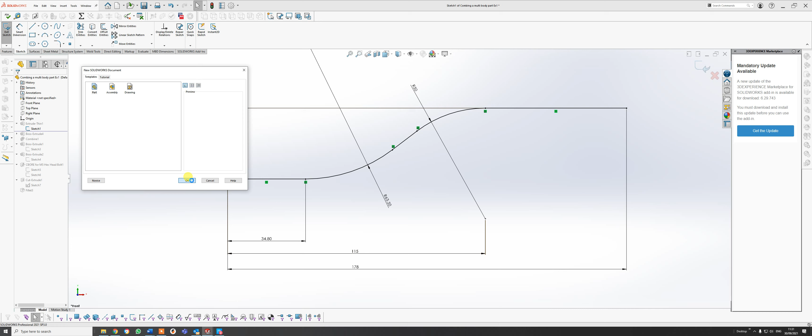Okay, that's the information from Sketch 1. So I'm going to open up a new drawing to do exercise 2. So new part. Okay, and I'm going to do this as a multi-body part, and first of all, we're going to do two separate sketches. So first one's the easy one.

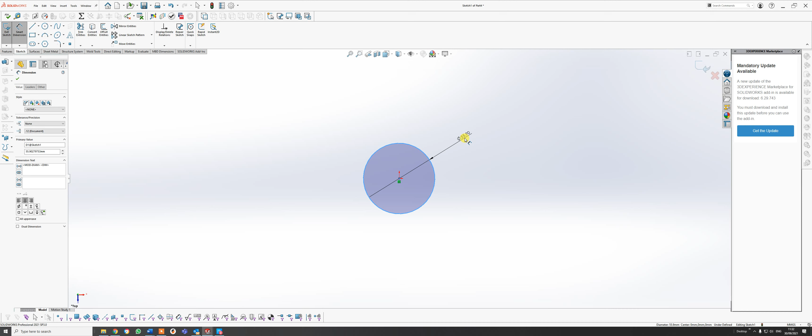So I'm going to go to Sketch. I'm going to pick the top plane because I want the plan view, and I'm going to draw a cylinder that is 50 millimeters in diameter. So just define that. Okay, and diameter 50. Okay, fully defined, and features. Now I want this to go down the way, I don't want it to go up the way. Let me just turn that round.

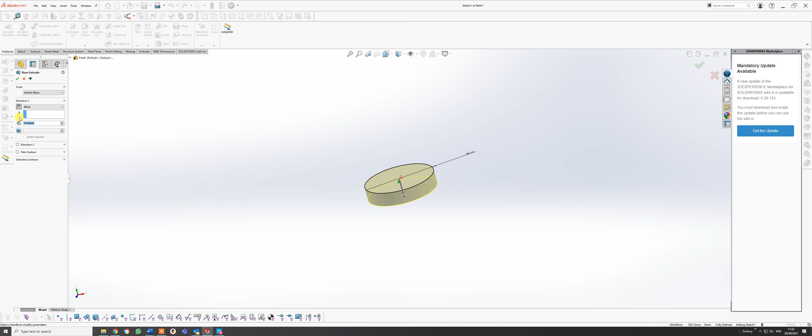Go to features, extrude boss base. Okay, I want to reverse that and go to 50. Sorry, 40 actually is the correct dimension. And I'll give that a green tick. Okay, so that's part 1. I now want to do my second sketch off there, and I'm going to do it off that top planar surface, which is the same plane anyway.

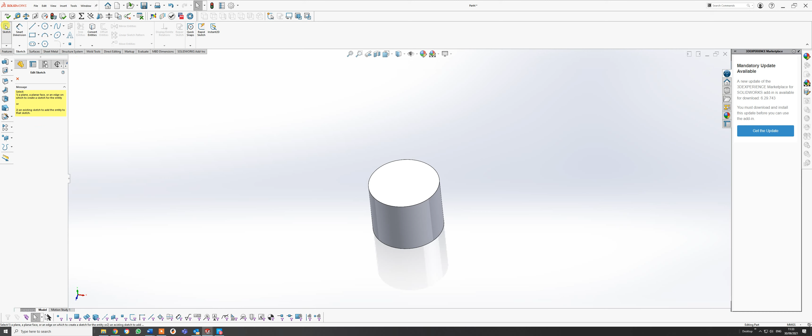So if I go to Sketch now, Sketch again, on that top surface. Now this time, press the space bar, and I'm going to go from the top because there's quite crucial dimensions here. So just zoom out a little bit. I'm going to draw a pattern here and then put the dimensions on afterwards, because it's a little bit easier to do that. So I'm just going to do this shape here.

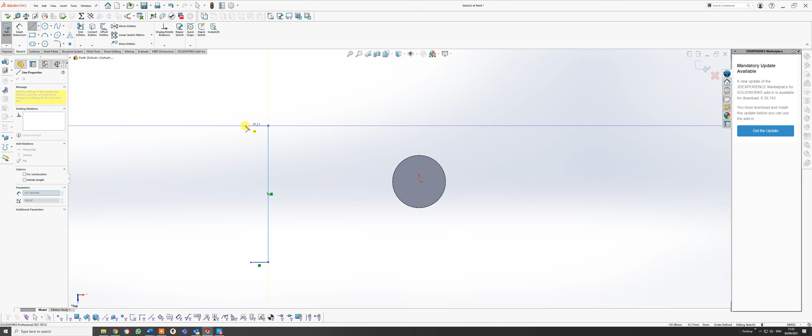Okay, into there. Now there is an arc, so press the A key down to about there, and then down to there. And I just need to tidy this up now. I'm also going to put a construction line in just to make life a little bit easier for myself. You'll see why in a second. And I've got my little indicator that's horizontal. And you see it's defined in terms of the horizontal, but I can pull that out as far or as small as I want to. I just want that as a reference.

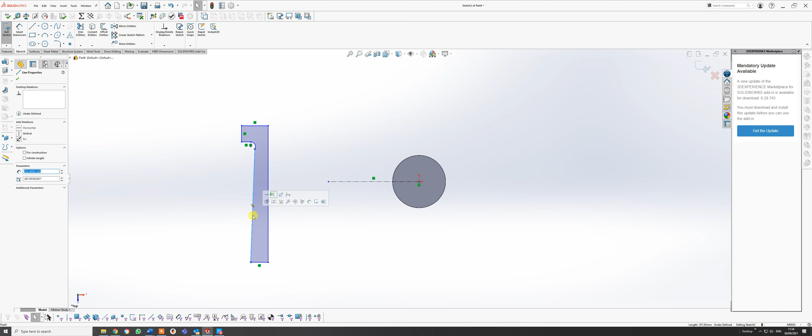So first things first, I want to make that vertical, perfect, and that one there, hold the shift key down. I want to make that tangential to that curve, and I do have some dimensions here. So the overall dimension here, let's start with this one here. So I'm just going to pick up on the line and make that 20. Okay, as I said, you do have a slightly different version than I have, so that's 20 there.

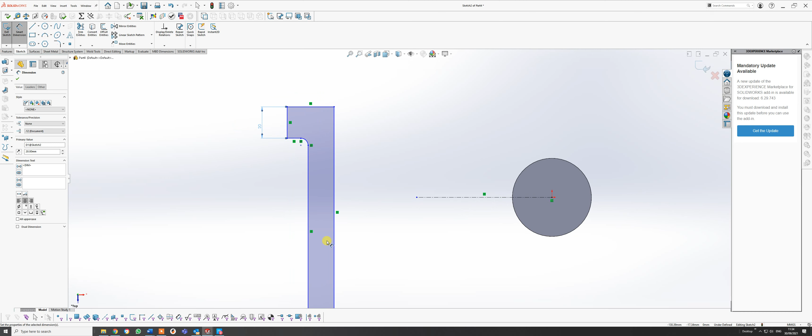Quite simple dimensions here. Let's make that one 10. Okay, and the distance between there and there is also 10 on that one. So just 1 second, and I'm going to pause.

It's always annoying when the phone rings halfway through and you have to take the call, but never mind.

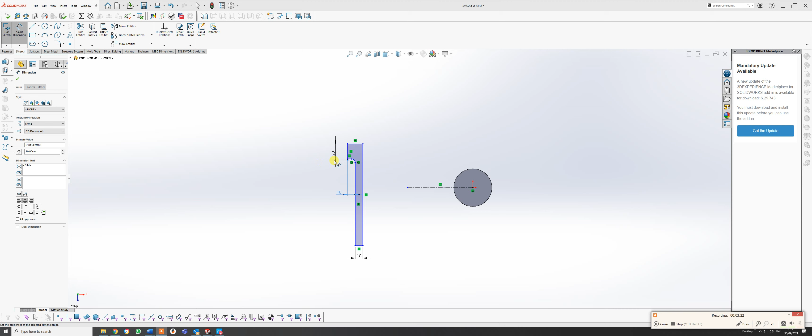So back to it. So we put those dimensions in, 20, 10, 10, and there's a distance actually from that point there to that point there, okay, of 115. Okay, and you see we started to define stuff there because it's starting to turn black. And there's also a dimension from there to that bar there, and that dimension is 95.

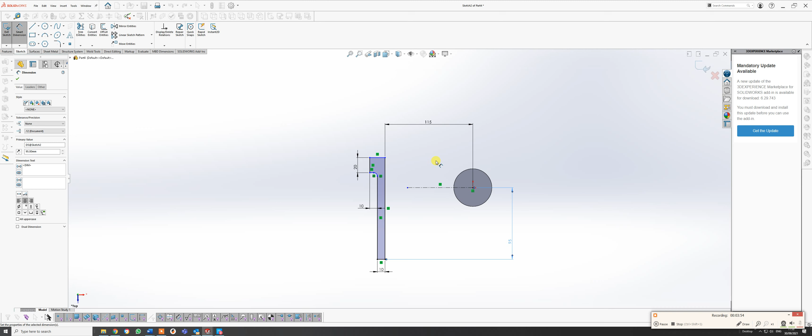Okay, we're still not there yet, because within this, if I press escape to come out of the dimensions, that there and that there have to be collinear. So you see that's why I put the construction line in, just to give me a little bit of a hand. And also I need to give that a dimension there. So back to dimensions and onto that there. As I say, most of you probably are very good at this, but it's good practice for you just to get back into the swing of things.

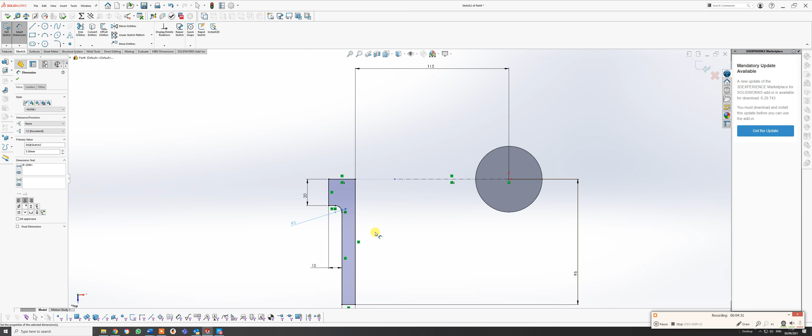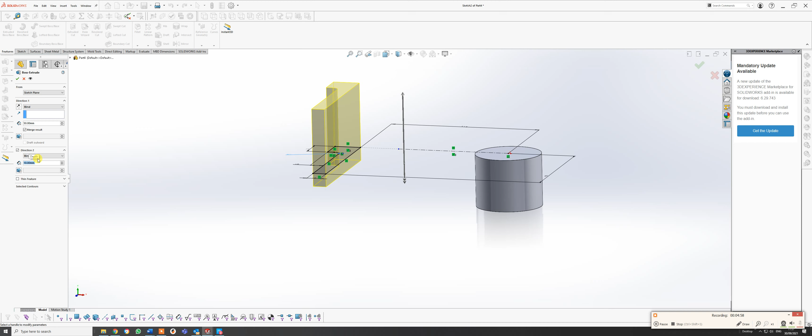So I've got the sort of basic layout of what I need, but this time I want to actually do an extrusion in 2 directions. So go to features, go to extrude boss base. That's gone up. That dimension there's the total 60. So I want to go up 50, and I want to go down direction 2. I want to go down 10, and that gives me the basis of my part that you see there.

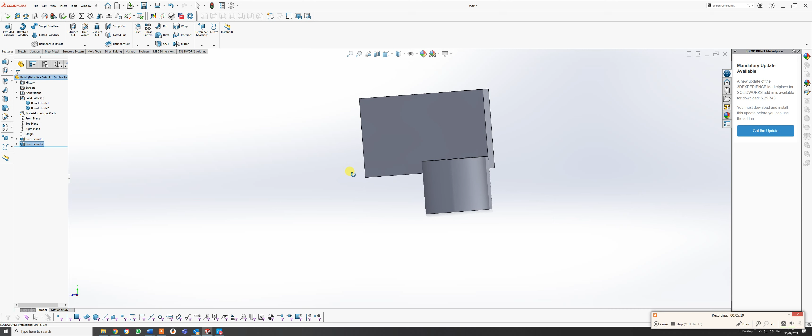So that should do. So I've got two multi-body parts there, and you can see from my solid bodies folder, if I just click on that, I've got two parts. There is also, if I put that in that orientation, okay, there is a through all hole in here. The easiest way to do that, you can use a hole wizard, but there's no point really. So just go to sketch on that planar surface, and just draw a hole that size.

The diameter of that hole is 30. So I go smart dimensions on that one. Not far off. So the more you use this, the easier it gets. And I am going to go, it's 25 from there to the center.

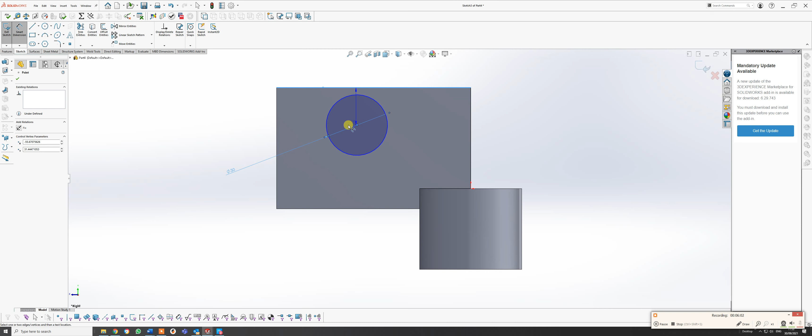Okay, 25. And it is 45 from that side to the center there. Click on that, and I can see 45.

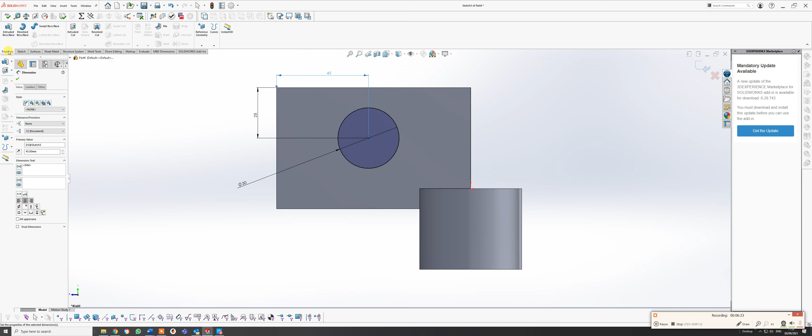Again, I don't need to come out of the sketch. I can go straight into features and go extrude cut, make sure that's changed to through all, give it the green tick, and therefore I've got my bases.

Now what you need to do - oh, there's another hole, sorry, beg your pardon. There's another hole through here, so I can do the same again. Go to sketch again.

I'll go onto that planar surface this time, and I'm going to pick up on the center because it's easy, but you can do a collinear aspect. If you did that, it will probably be funny - sorry, not collinear, concentric circle, which it's done, and put a dimension of 25.

Now I'm not sure if you understand all that terminology, but hopefully by doing these exercises you'll start to learn doing it. Go to features, go to extrude - sorry, my mistake, just back out of that, press escape, or just the red cross, go to extrude cut.

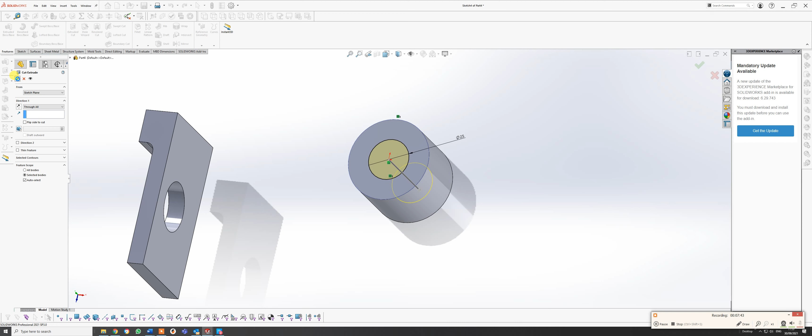That picks up, it knows what I'm working on. I just change that rather than blind and go through all, and there we go, I've got my two parts. Now what we need to do here is actually have a bridging part between these two.

Easiest way for doing this, I'll show you the way I would do it. As you would probably learn with SolidWorks at the moment, there is hundreds of ways of doing bits and pieces on it, but I need to do this.

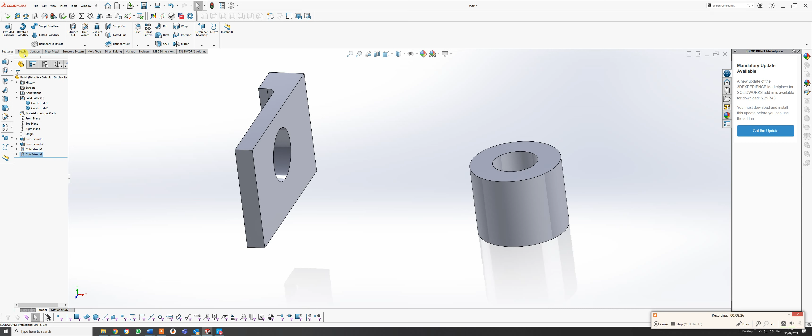The actual thickness of the part is 10 mil when you look at it, so to put it in here I would work off that plane there. If I go to sketch, I'm going to go into that surface there.

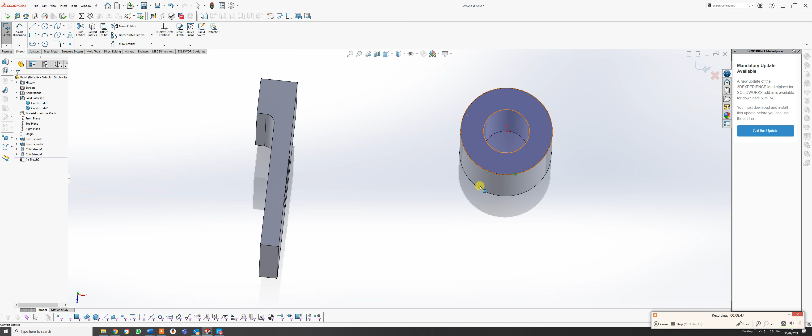It didn't do it that time, but it's done it now, has it? Okay, I think it's done it there. What I'm going to do is actually convert entities this time, and of that one, and you'll notice that's gone around the outside. Now press space bar there to come up.

I know that I need to go to this edge here, so I'm just going to take a line from there to the edge of that there. Now I could have converted entities to that center, which actually would have been better, because you're then guaranteed it to go through the solid, especially if you're working with draft angles.

So experiment and see how you go. I'm going to come off that there, and I'm going to do another sketch, which I know goes from that point there, and it goes tangential.

So like in the previous exercise, I'm just going to go slightly wide of that, and then click on the line, hold the shift key, outside the perimeter of that circle, tangential.

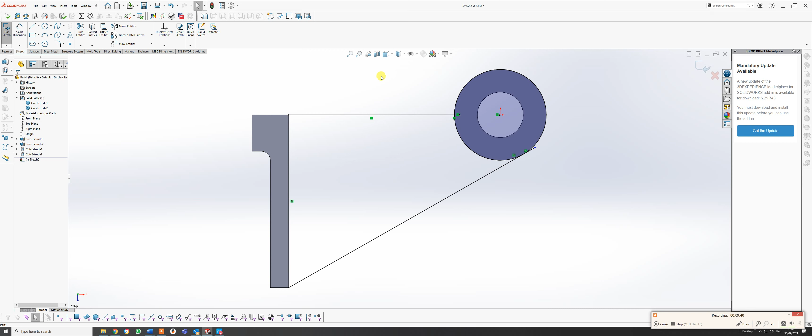I'm going to go to convert entities again, and I'm just going to convert that one. Okay, just complete that square, and I'm going to go to trim, and all I'm going to do is take that circle out, take that little bit out there, and you'll see that I have that bridging part from it there.

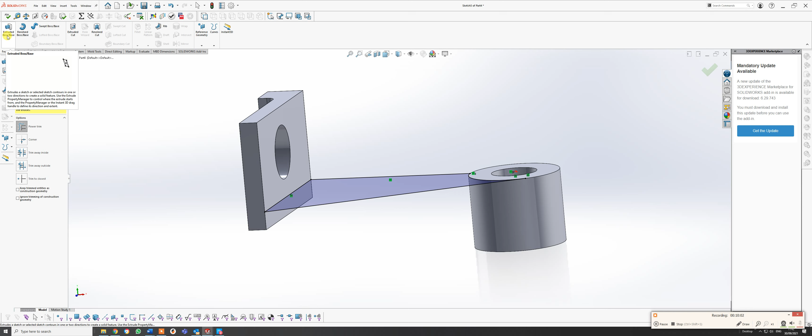So go to features - because I've used this so often for a long time, I know I don't need to come out all bits and pieces. So I'm going to go extrude boss base.

Okay, and that's going up, but I actually want it to go to surface. So I'm actually going to go up to surface, and I'm going to pick the lower face there and make sure that the merge command is there. Okay, and there we have that part there.

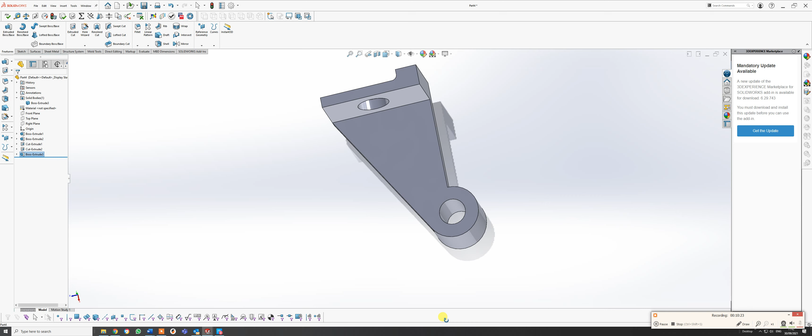Now this is all very engineering, sort of mechanical based. I'm just checking that line there that I'm okay. That is a tangential relationship.

I also need to put a fillet of 5mm in. So if I go to fillet, it should come up. It's default 10, change it to 5, and just pick that line there. And there we go, that is that part that has been constructed.

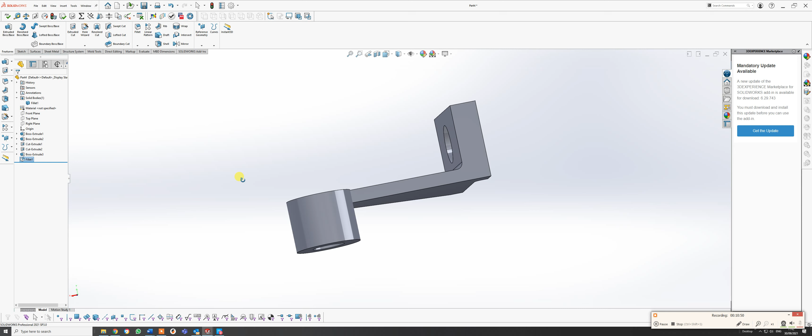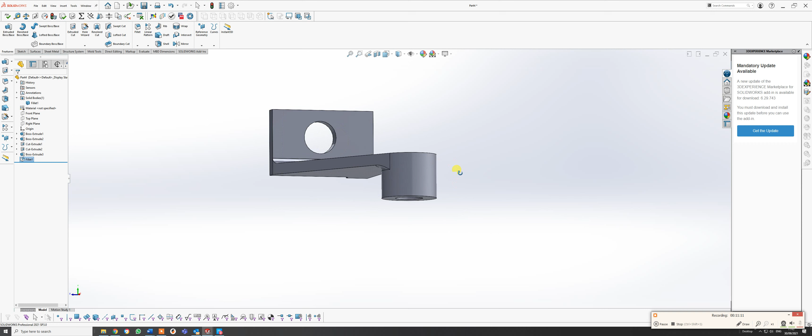There is actually a fillet underneath there as well. So if I just go back into here, go to edit feature, and just pick the underside - no, face. Pick that edge there. Perfect. Okay, so this is very, very basic stuff, but it just gets you back into the modelling.

So save that part, close it up, and we shall move on to exercise 3.